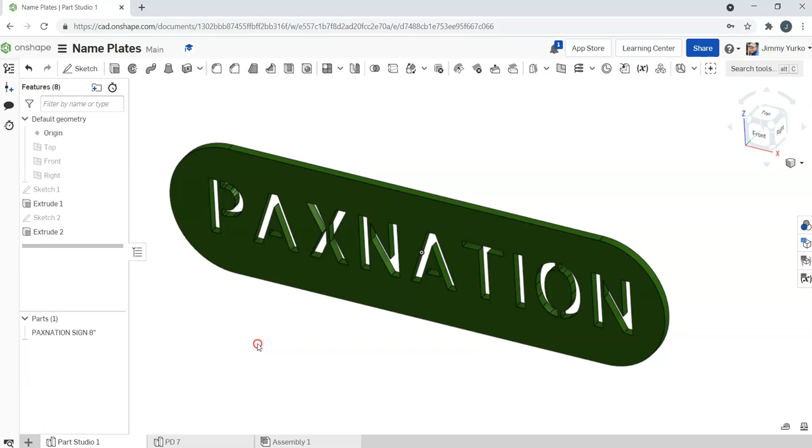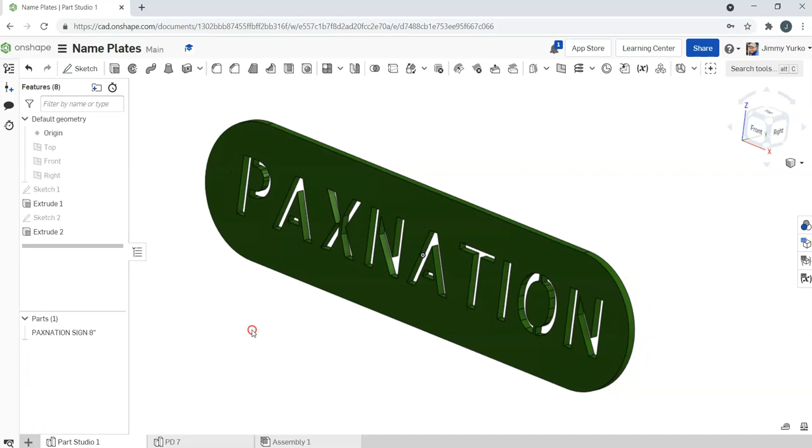We're going to show you how to make this cool nameplate. When you make yours, you'll add your own name, nickname, or saying, whatever you want. This is a gadget we'll make in Onshape, then print out using a laser cutter so you'll have a physical product when done. You can use it by itself as a sign, add it to something else, put a light behind it to make a lighted backdrop or display, or use it as a stencil. So this is a pretty cool activity.

Let's get started. First thing I'm going to do is open up and create a new Part Studio. Of course, you should have a document, and you should name the document nameplate.

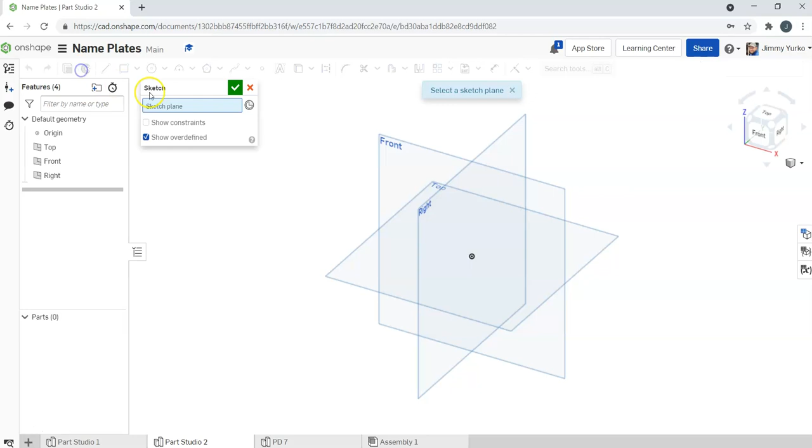As always, we're going to start a sketch. We're going to start this one on the front plane. Tapping the N key on your keyboard will get you to the normal view. You can also click the front button on the view cube here on the side. Remember that your view cube lets you quickly rotate to different viewpoints.

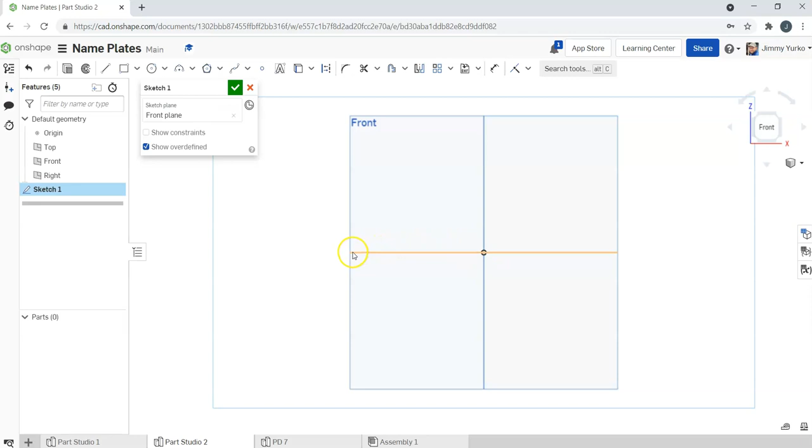Using your mouse wheel, you can scroll in and out, and you can pan side to side as well. Scrolling the wheel zooms in and out, and it zooms on the place wherever you put your mouse. Notice right now my mouse is on the origin, so if I scroll in, the origin stays centered. If I put my mouse over here at the end of my work plane image, that's where we're zooming in and out. If I zoom in on the word front, it stays closer to the front. So that's how the mouse wheel works.

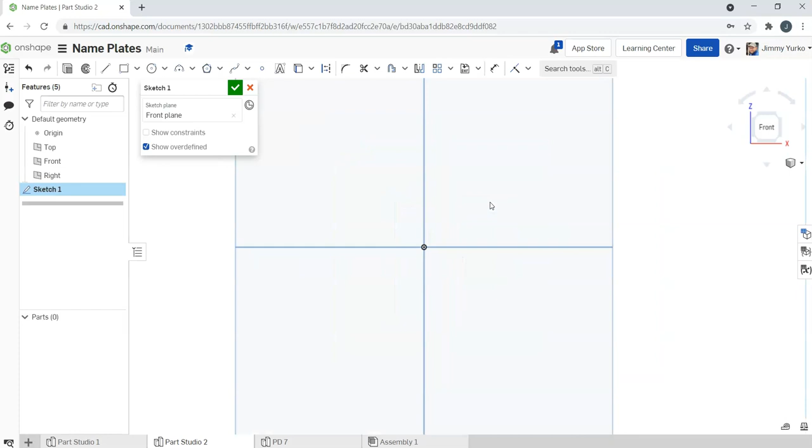If you push straight down on the mouse wheel until it clicks and then move side to side, you'll be able to pan around. If you don't have a mouse, the Z key zooms out and Shift Z zooms in. And of course, hitting the front button will auto scale everything to the middle of the screen.

All right, with that stuff aside, let's go ahead and start this model. I'm going to put this in the center of the workspace. I'm going to turn my planes off by tapping P, just because they annoy me. And we're going to use the center point rectangle, R.

Notice that when you drop down a menu, you can see shortcut keys identified. And of course, if you hover over something with your mouse, some instructions will pop up. So we want the center point rectangle, and I'm going to click and release on the center point and tap.

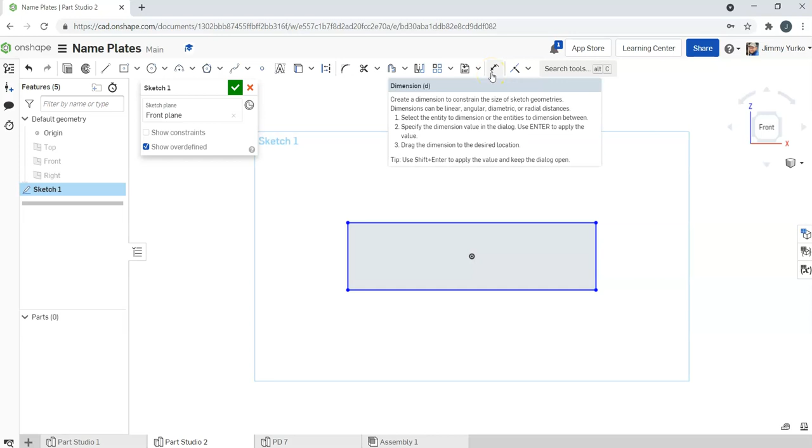Now I want to add some dimensions to the part. I can, with some special clicking, just type that in immediately. But frankly, I find tapping the escape key and using the dimension tool at the top of the screen to be the most reliable option, or just tapping the D key on your keyboard, which will select a dimension.

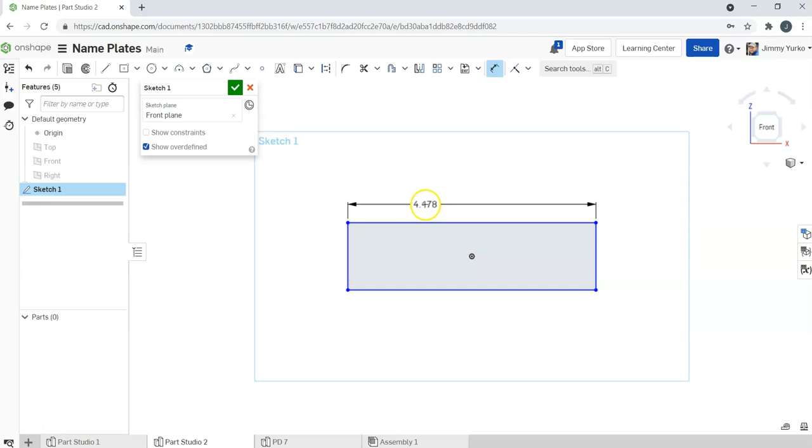We're going to dimension the top of the rectangle by hovering our mouse over the line at the top of the rectangle. Whenever it highlights to this golden, yellow, red, whatever color pops up for your eyes, you're going to click and release the mouse. Let's click and release, then move your mouse up off of the object.

Now, where do you put this? Well, technically, it really doesn't matter, because all we're doing is measuring the object. What it does do for you, though, is it's good practice to put the number between the arrows as close to centered as possible, and off of the object far enough that you can easily read it. It's a bad place to put it here, a bad place to put it here, and a worse place to put it along here. So a good spot is right there.

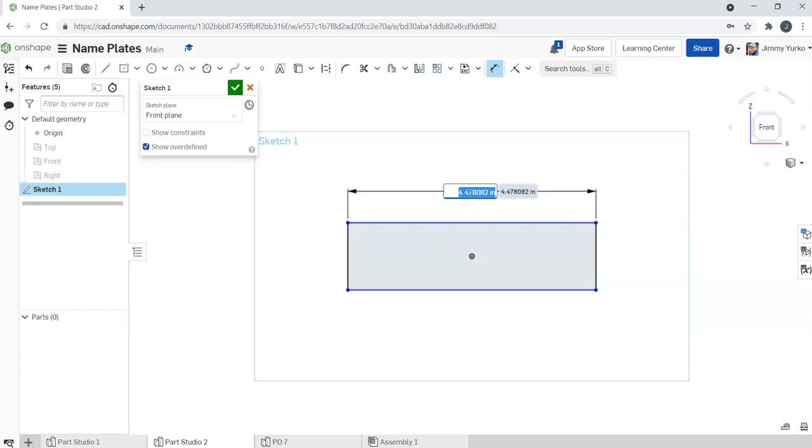Let's go ahead and make that 4 inches. And then we're going to do the same for the side. This time we'll just set it to 1 inch.

All right, now that we have that set, we're going to go ahead and name that nameplate. You'll notice that I'm going to be doing all of my typing in all caps. That is best practice for working with technical drawings because it is easier to read, particularly across multiple languages, and it is a standard for producing drawings. So here you go.

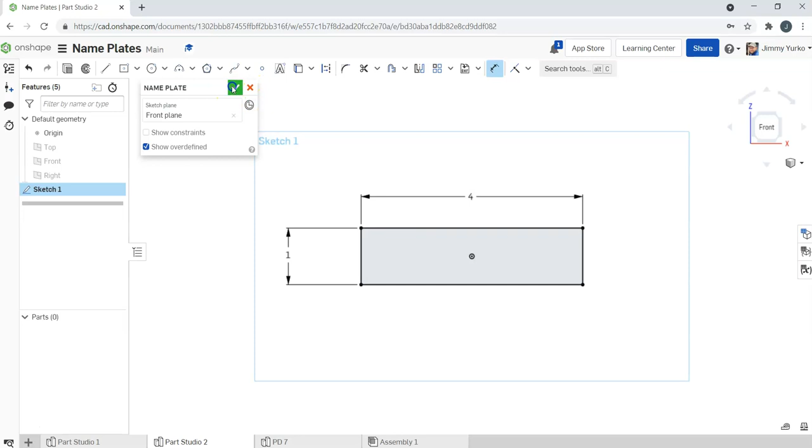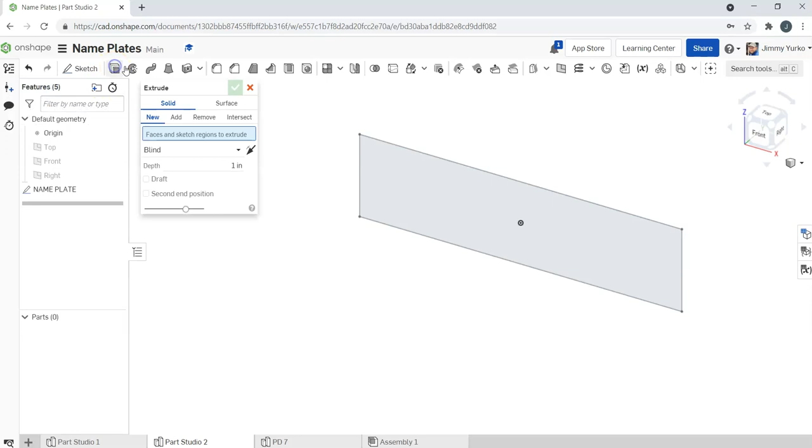Now we have a rectangle, not exactly a nameplate yet. So what are we going to do next? What I'm going to do next is extrude that into a 3D object. Hover the mouse over the extrude tool, click on the extrude, or you can just tap the E key, and then click the space that you would like to extrude.

So we're going to take the mouse over and click on that rectangle and release, and you'll see that it becomes a block.

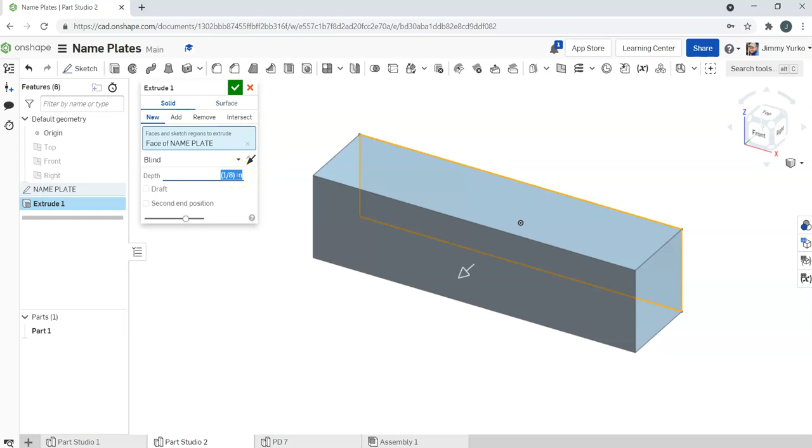We don't need the block to be that thick, so we're just going to go 1/8 of an inch. The data entry fields in here are actually little calculators, so I don't have to convert that to decimal or anything. Just 1 divided by 8 will create that. We'll do the math and convert that to the decimal, which is 0.125. In this case, it's actually just showing the fraction - usually it converts it over.

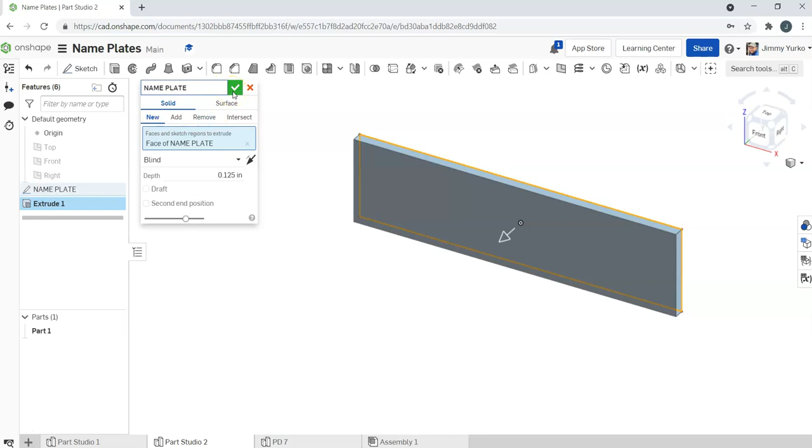We'll go ahead and name that nameplate. This is a new part, it's a solid. So here we go, we're all set and good, and hit that check mark. Now we have a solid new part.

Let's go ahead and rename our part to nameplate. Matter of fact, you probably want to put your name here. I'm going to just put a note here - use your name, because you're going to be turning this into me, and I would like you to provide it to me with your name so I know whose stuff I'm getting.

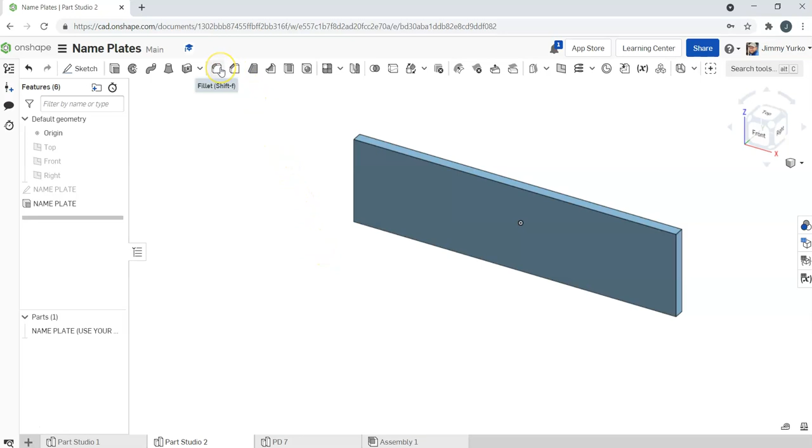All right, now if you notice, our original part had rounded corners and this one doesn't. So let's go ahead and round those corners. Now we could have drawn the round corners from the beginning, but there's a really cool tool that makes this really easy. We're going to use that, and it's called Fillet. Its shortcut is Shift F.

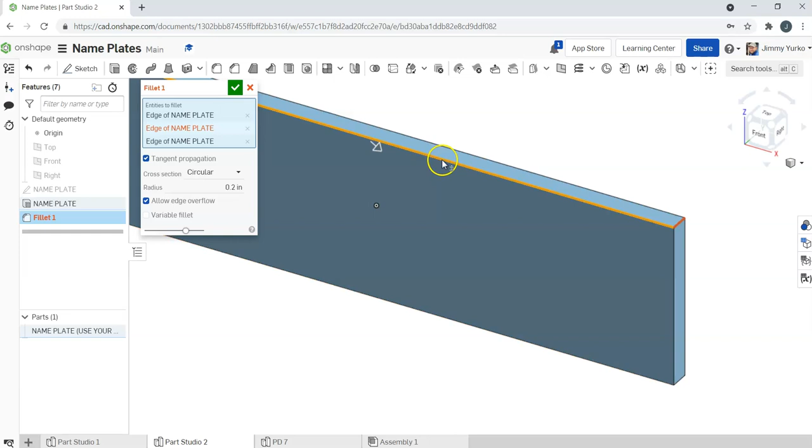What we're going to do is click the corners, the short corners, these short corners here, the little tiny skinny short corners. We're going to click on those. If you accidentally click on a corner and you're like, that's not what I wanted - if I click this edge here, just click it again to unclick it. Okay, so click that, and then what are we going to?

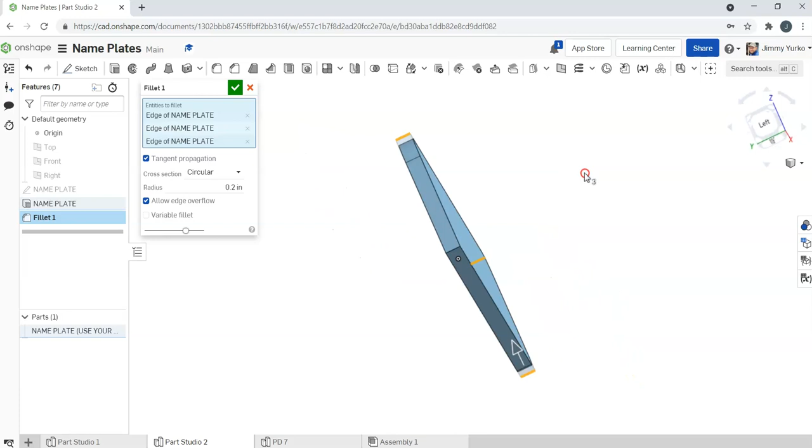We need that one. So if you want to get that fourth corner, you can click the lower left corner of the cube here, or you can right click on your mouse and just orbit around that way. Right clicking on the mouse and moving the mouse around will let you orbit the object. And click on the object, and there you go.

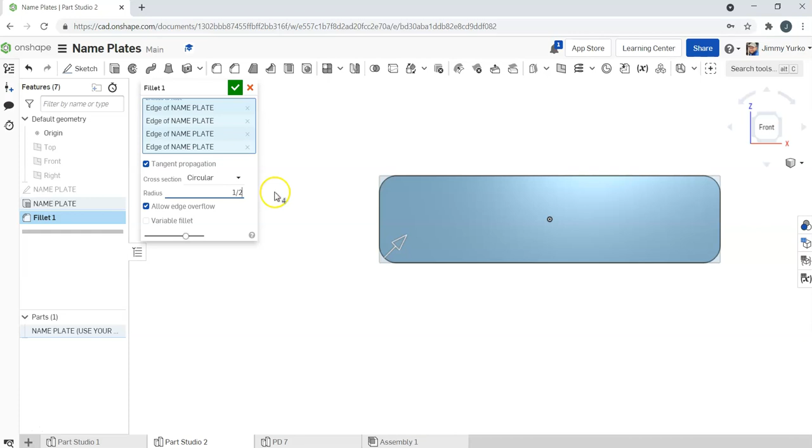Now we want to make that full round, so let's go ahead and make that 1/2, because that was 1 inch tall - that was the original height, and we're going to do half of that. So these are radii, you can see that we can play with this. We can use the push-pull on the arrow to do that as well, but we want that to be 1/2. We'll just leave that called fillet.

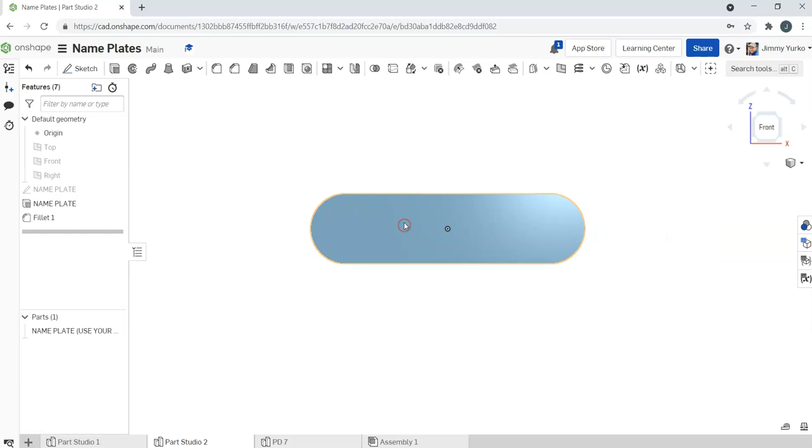And there you go, so now I have a plate. Woohoo! So there's my back plate. Okay, if I want to change the color, you can just right click on it, edit appearance for nameplate, and you can choose a different color of your choice. Colors are great because they actually help you see things a little bit better, makes them look more realistic.

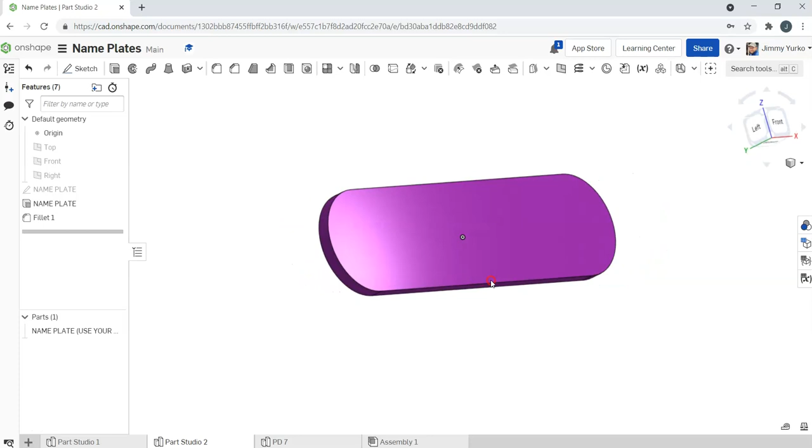Now we're going to go ahead and add the lettering. So I'm going to click a sketch, click on start a new sketch by tapping the sketch button or Shift S on the keyboard. Then we're going to tap on the front of the object. The N key on the keyboard turns you normal to, as does clicking the front button on the view cube. Either will work just fine.

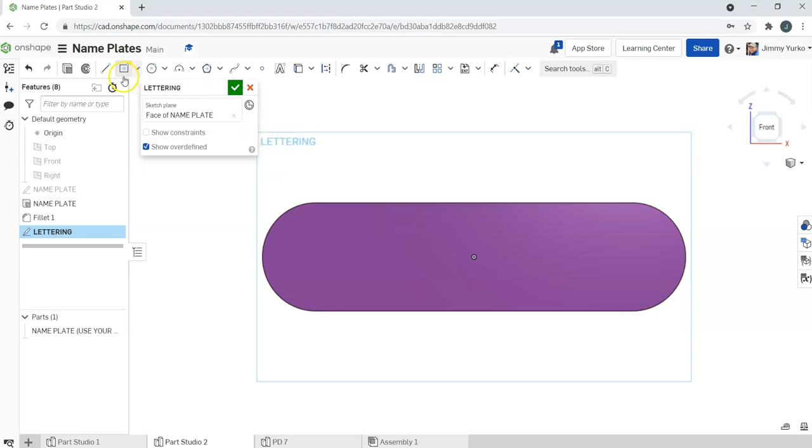We're going to go ahead and put our lettering on here. I'm just going to call this sketch lettering, and we're going to add our lettering. So how do we do lettering? Well, there's a lettering text - there's a text button right up here. So just click on that text button, and we're going to draw a text box.

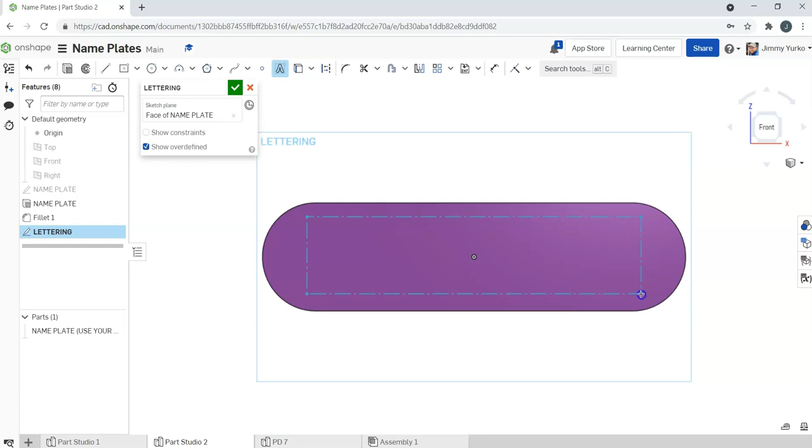You draw a text box diagonally from the corner. So just click with your left mouse button and drag across the surface to produce a box to type your text in. This is where you put your name here. And you can see that I'm using all caps.

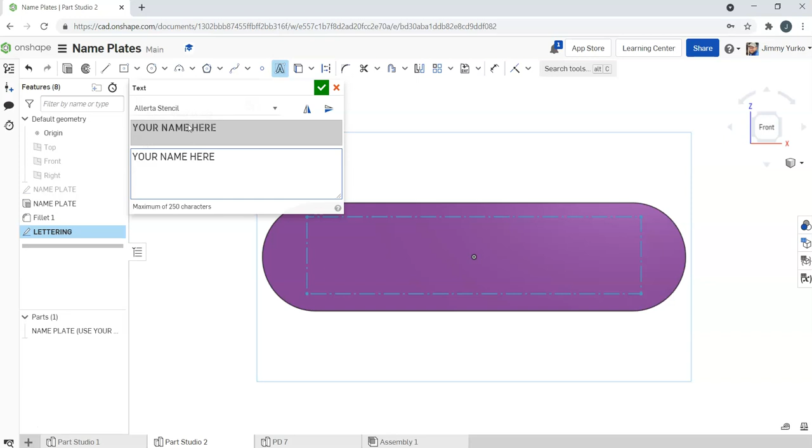And now we got to pick a font. So we're going to cut this out, so the best font for cutting this out is this first choice - Allerta Stencil, this is a stencil font. It will automatically create a font that is easily cut and the part pieces don't fall out. Hit that - and oh no, that's way too big, and yours probably will be too. So you have a couple of choices.

We can make a really small choice by - come on people, oh I know what I can do - by lining this up in the center point here and then pulling that down.

This is not my recommendation. I don't recommend you do this. I think the better trick to do...

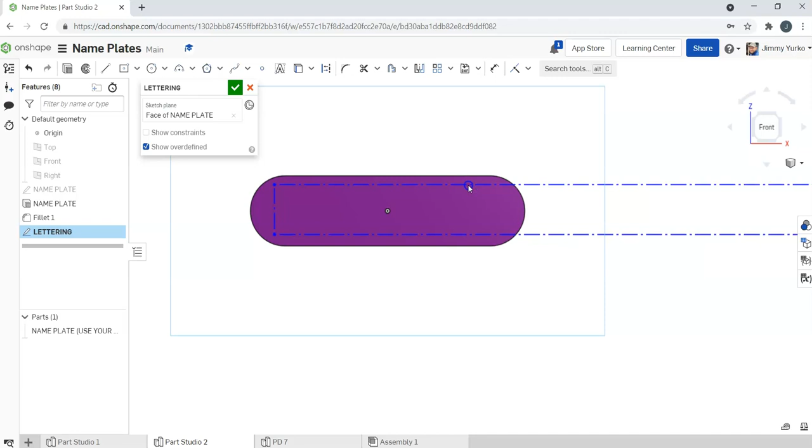Is to pick a word, phrase, or name that actually fits in the space neatly. You can see here that I can get 1, 2, 3, 4, 5 letters in there nicely. I could make this a little bit smaller, get 6 or 7, but much more than 6 or 7 letters, you're going to have a hard time getting that in there. So I would choose between 4 and 7 letters in your text for this project.

Once you've done that, you're ready to move on to the next step. If you want to make changes, you just double click on it, or right click and choose edit text. Usually double click works, but sometimes right clicking works too. So we're just going to change that text, and I'm just going to put a big old Yurko, since, hey, why not, that's my name. So that works, and that fits.

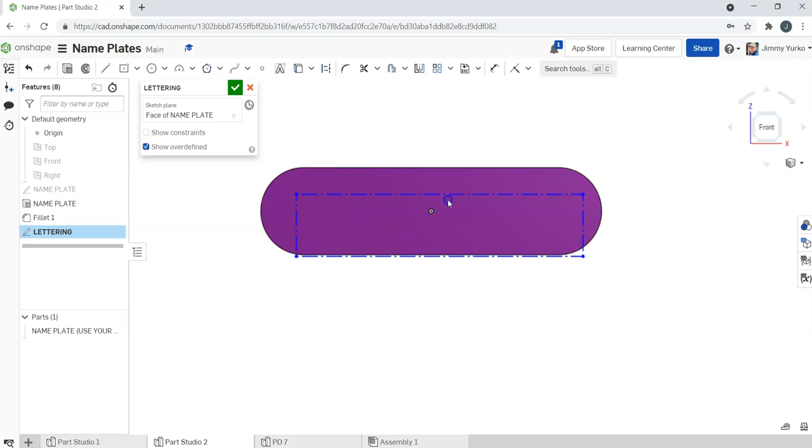Now, you probably saw me earlier stretch it to fit, and I didn't stop to explain how that worked, because if you try it's probably not going to work so great. You'll notice in the middle of the top line is a dot. That dot is a midpoint grip, a midpoint snap location, so that's the middle of the line that makes up the top of the text box.

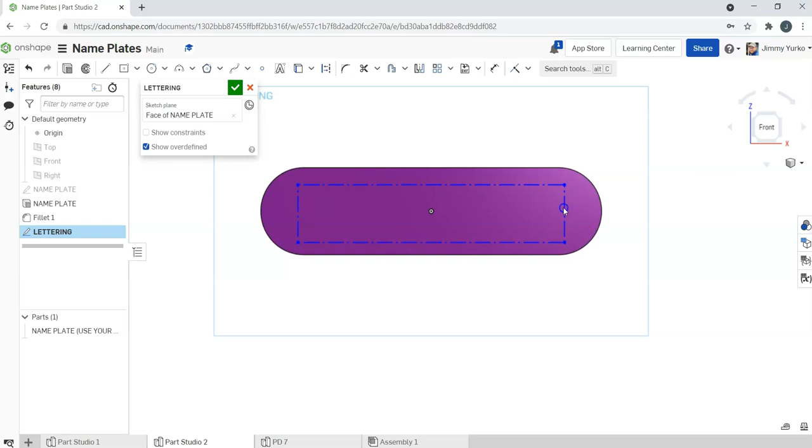So what I'm going to do is grab the text box by that midpoint, hover over the midpoint of the object, the origin here, and pull up. So long as you see that dashed line and the yellow glow, when I let go, those are going to be aligned vertically, and that's what that grayed out box with a vertical line in it means. When I let go, if I go to pull on this, the object can't move. Since it can't move, the only way it can comply with my instructions to change it is to change size. That's how you get that centered. We're killing 2 birds with 1 stone here, getting it centered and adjusting my size.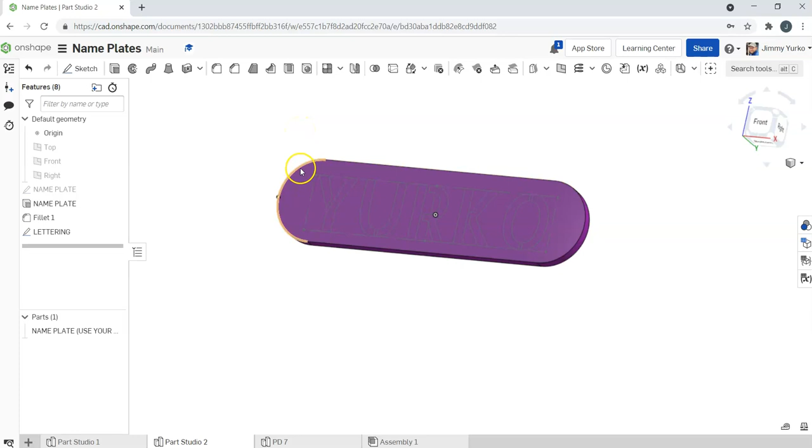Once you have your lettering done, just hit that green check mark, and now the name is ready to cut out. Let's go ahead and cut that out. We're going to use the same tool we used before to create a 3D object. This 3D object is going to be a cutaway. So we're going to hit that extrude button, or Shift E on the keyboard, and call that lettering again.

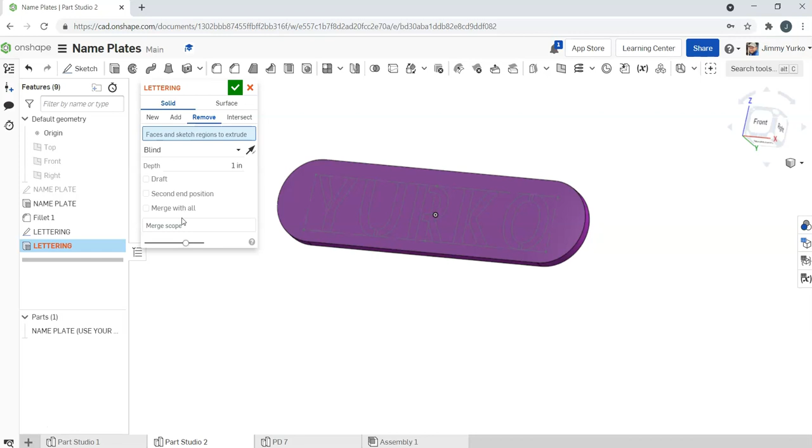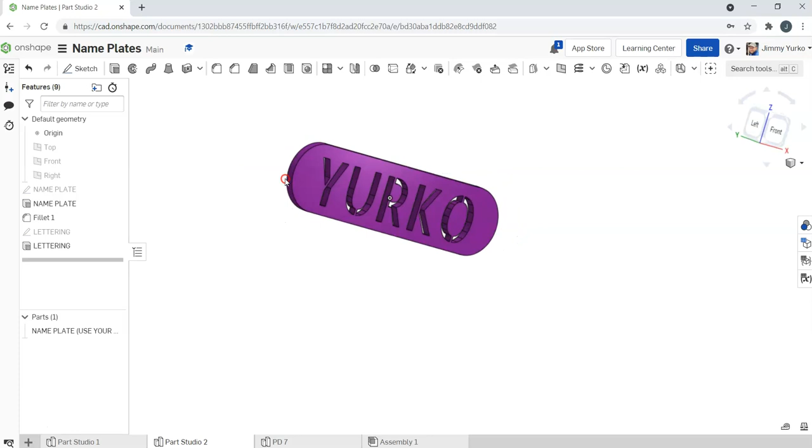This is going to be a remove, and it's going to ask us for the faces and sketch regions to extrude. The easiest way to do this is, instead of clicking on the shape, which sometimes works but sometimes generates independent parts, let's just click the lettering sketch, grabbing that entire sketch. As far as the depth goes, we're going to click through all, and that's all there is to it. Hit the finish button, and look at that. There you have it. Well, this one's mine, but you'll make your nameplate just like that.

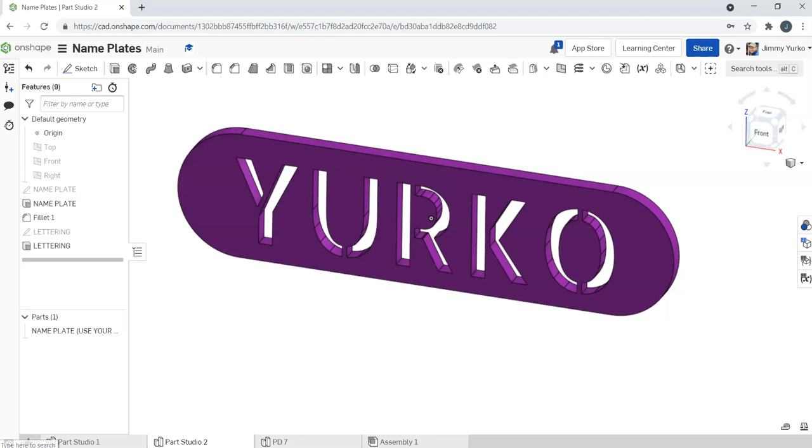To turn this beast in, you're going to take a screen snip of this. Make sure you put the whole darn thing in, take a picture of the entire space. Come on down to the bottom of the screen, hit the magnifying glass.

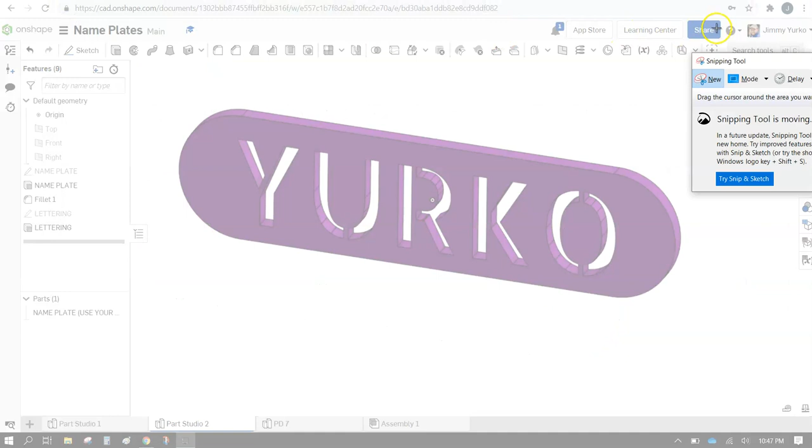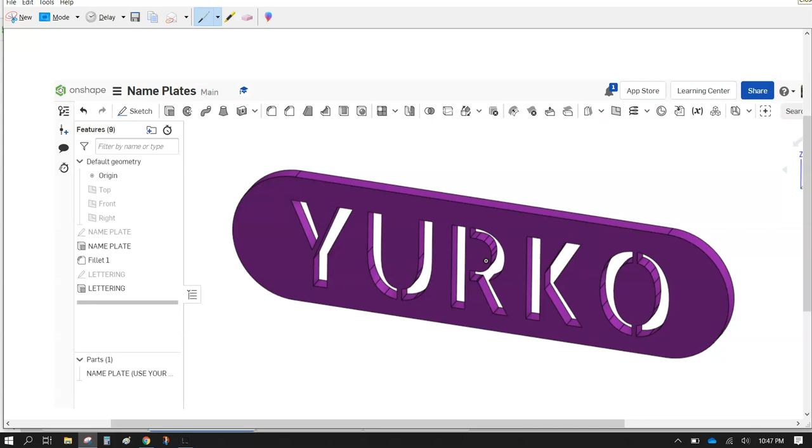Type in snipping tool. When snipping tool pops up, or snip and sketch, click snipping tool, click new. Make sure you get your whole name in here. I'd prefer if you could even include the whole screen so that we get the sides, because I really like to be able to see what steps you went through. All the steps we went through to create this are visible on the left hand side, so make sure you include that. It really helps, especially if you had trouble, and that allows me to help you figure out how to fix it.

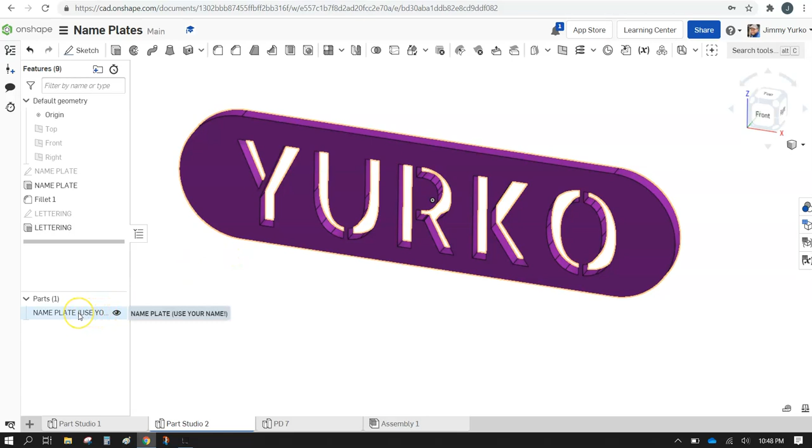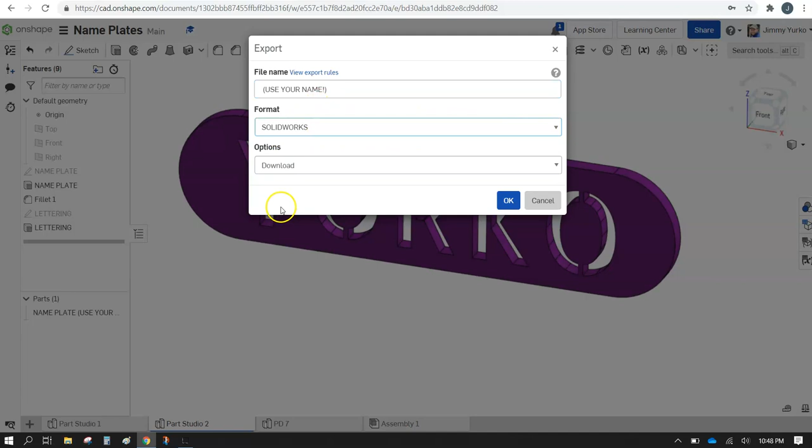You'll then click save and give it a name, save that, and upload it to the assignment to get credit for it. If you want me to print this for you, you're going to want to export this. To export it, right click on the part down here and choose the export button. And we're going to export, make sure it just has your name on it, use your name. For the format, you're going to choose SolidWorks. That's going to allow you to download it. Click the download button, and once it's ready, it'll download.

It'll be in your downloads folder, and this file you can email to me, and I'll print it out for you.